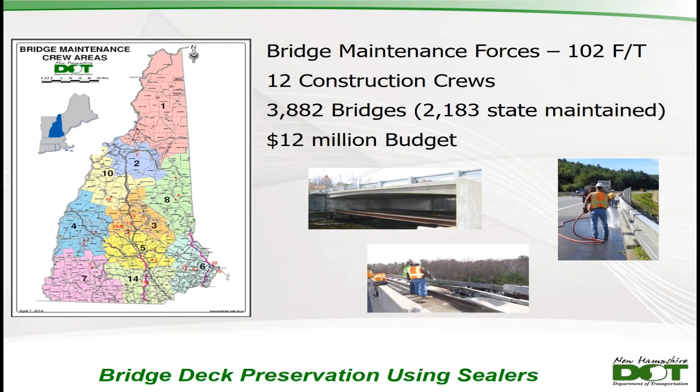So for those of you unaware, New Hampshire is located in the northeast in New England, bordering the states of Maine and Vermont, the Commonwealth of Massachusetts, and the province of Quebec. We do have in-state bridge maintenance forces, so we'll be discussing some of the work that we do in-house, as well as work done by contractors. I think some people refer to the region of the country as the snow belt. As a bridge maintenance practitioner, I think it's more applicable to refer to it as the salt belt. It seems like that's kind of what we keep fighting year after year.

Just a little background information. Per state RSA, in New Hampshire, all structures having a span of 10 feet or greater are considered bridges. So the New Hampshire DOT maintains 2,154 bridges. Of those, about 60% meet the federal highway definition of a bridge. We are primarily a membrane and pavement state. We have somewhere around 140 concrete-to-grade bare decks. We're using the term bare decks moving forward through the slides.

I have a couple photos of bare decks. The top is a job that bridge maintenance crews did, a superstructure and deck replacement, completed about 6 years ago. And then underneath is one completed by a contractor. That was a rapid precast bridge construction with butted box beams and a reinforced concrete overlay.

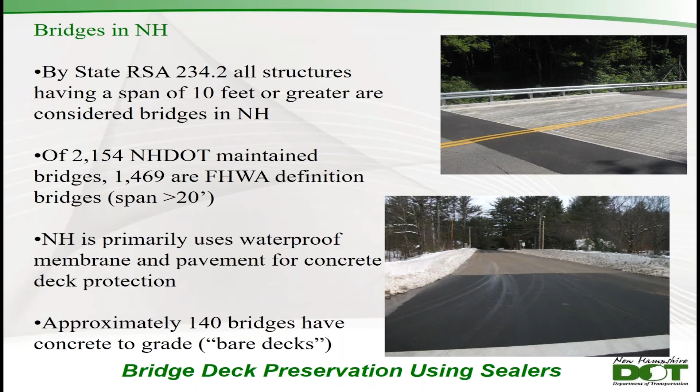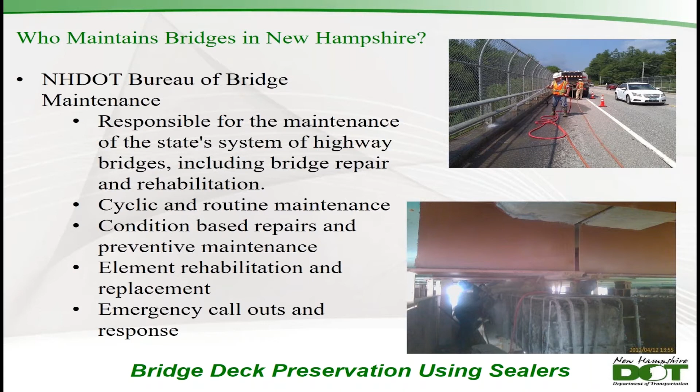Bridge maintenance and bridge work is coordinated through two different bureaus in New Hampshire. The first is the Bureau of Bridge Maintenance, where I work. We perform all cyclic and routine maintenance that's done on our existing infrastructure. We do condition-based repairs and preventive maintenance work, element rehabilitation and replacement, and we're also available for emergency call-outs and response. The Bureau of Bridge Design is responsible for the design and preparation of contract documents for projects that are performed by contractors. I'll be referring to this as the capital program in later slides. They're also responsible for the bridge inspection and ratings for state and municipally maintained bridges.

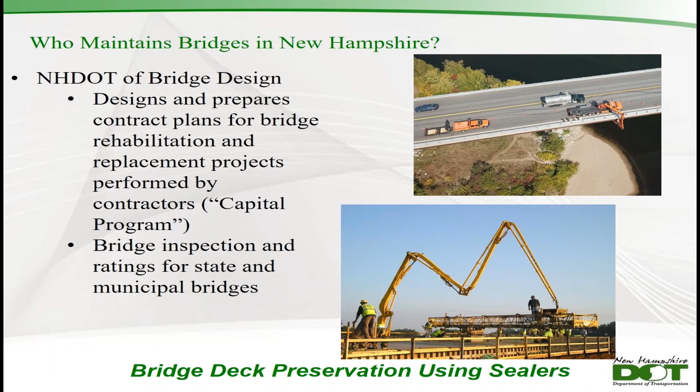There are four types of sealants that we apply in New Hampshire. First is a penetrating sealer, silane, as Tom discussed previously. And we're using this just to seal up the concrete surface. This is a product that's applied by contractors doing the capital projects. They apply it to new and existing concrete surfaces on bridges that they worked on. It's applied by bridge maintenance to existing structures on a 4-year cycle. So our crews have a set number of bridges that they maintain. We endeavor to wash those bridges on an annual, biannual basis. And then on a 4-year cycle, we'll follow up with a silane application to the surfaces.

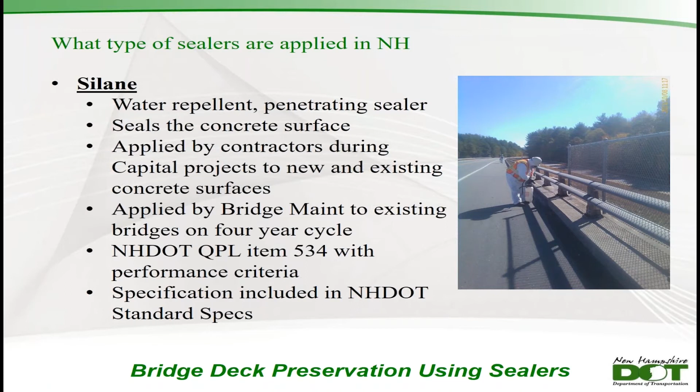New Hampshire does have a qualified product list item for silane. It includes some in-house testing that's done. And we do have a specification included in our standard specification book that discusses material properties as well as construction requirements.

We also do some crack sealing. We use both epoxy-based as well as methyl methacrylate crack sealers. I typed on the slide that it's applied inconsistently in the capital program. That's being a little kind. It's a little bit touch and go whether or not cracks get sealed during a construction project. We routinely apply them in bridge maintenance during our maintenance activities, and will often follow behind construction projects, sealing up cracks, either in decks or in the curbs. This is also a QPL item with performance criteria in New Hampshire. We don't have a specific specification in our standard specification book for concrete crack sealers.

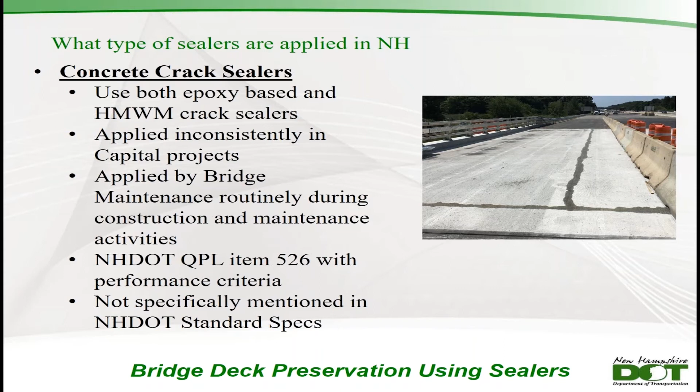The picture you're seeing is a contract job that, again, has a butted concrete girder bridge with a reinforced concrete overlay. So we have some reflective cracking coming through the rigid overlay that contractors addressed with a high molecular weight methyl methacrylate sealer.

Tom also referred to healer sealers. This is not a product we've used a lot, but it's one we anticipate using a great deal more moving forward. The product we've used is a methyl methacrylate-based sealer for cracks as well as the surface, and then we have a broadcast media over the top for friction. It hasn't been applied as part of the capital program. We have a couple bridges in bridge maintenance that we've applied this to based on some observed cracking and surface condition.

It's interesting how things come up. We were talking this summer about making it a point of emphasis for our maintenance crews to review the bare deck bridges in their area and to identify candidate projects for products like this. There is an NHDOT QPL item for this, for both methyl methacrylate and epoxy-based flood coats. It's not something that's specifically mentioned in a standard spec.

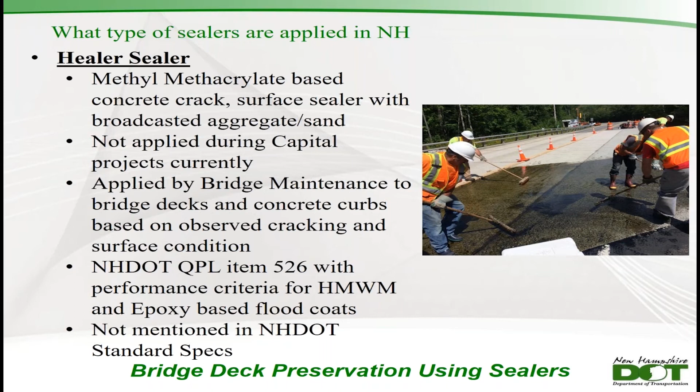The photo here is one of our northern crews applying a methyl methacrylate healer sealer to a bridge deck in Gorham. It's a deck that crew actually replaced about 2002, and we moved onto the job to do an expansion joint replacement, and while there, did a sealing on the deck.

We also have a little bit of experience applying thin polymer overlays. The particular product that we've used in maintenance half a dozen times includes a primer, which is really just a methylmethacrylate HMWM sealer that goes down to seal the cracks and seal the surface. It then gets a two-part polymer overlay with an aggregate broadcast over the top, placed down in 2 layers.

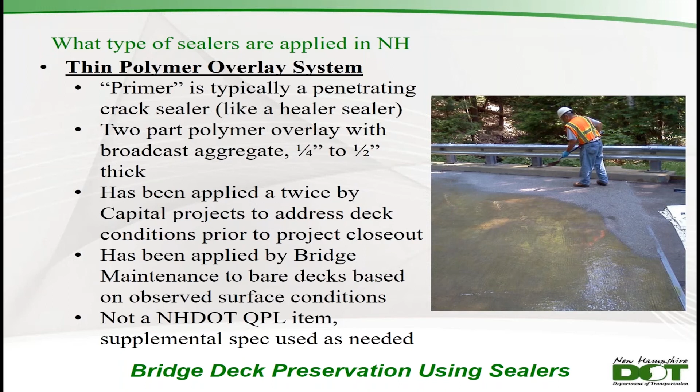This has been applied on a couple different capital projects prior to project closeout, and we've applied this probably to 5 or 6 bridge decks based on observed surface conditions. This isn't something that we have a QPL item for or a standard specification for at the moment. We're fortunate in New Hampshire that we're a relatively small state. We have 12 bridge maintenance crews spread around the state.

Each crew is responsible for somewhere between 175 and 250 bridges. They wash those bridges on an annual or biannual basis. So we have eyes that look at our bridges on a regular basis. And I can drive to any state-maintained bridge in the state within about 4.5 hours from my house. So it's relatively easy for us to go out and review our bridge decks, particularly if there's an emergency or something that was called in, we can have a crew or someone get eyes on it relatively quickly.

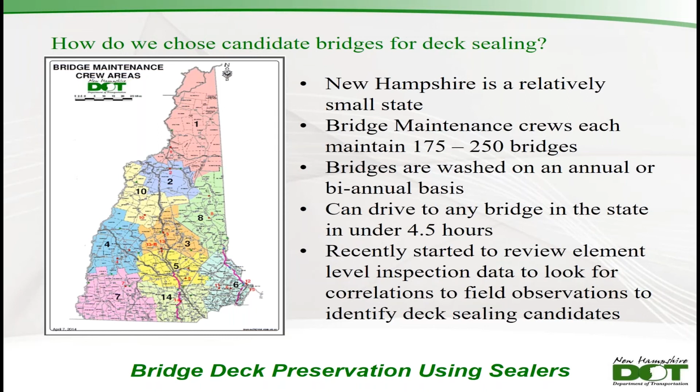Based on our conversations this summer about looking to promote deck sealing through the use of an HMWM sealer or a thin polymer overlay, we started to look at some of the element level inspection data just to see if there was anything that we could pick out of there that would help us either choose candidates or to watch in the future after we apply these products to see if there's any change in that rating. What we've found so far is that the most useful fields in the inspection data are the hand tag fields where the inspectors note cracking and then location.

For our bridge design personnel, they're able to also review bridges easily that are coming up in their work plan. They may have a bridge that's in the works for a number of years, and they're able to easily go out and review that deck, review that bridge multiple times if they need to prior to the project advertising. In addition, our bridge inspection teams are run out of bridge design, and so they're reviewing the bridges on a regular interval per the NBI guidance.

Now, in bridge design and to some extent bridge maintenance, we also have a list of bridges that we maintain in a database referred to as our maintenance and preservation list. And we put a ranking on that based on data from different sources. So we'll use the bridge inspection data, traffic volumes, the bridge type, the preservation history, and our design chief in bridge design will use that as a starting off point when he's looking for deck preservation projects.

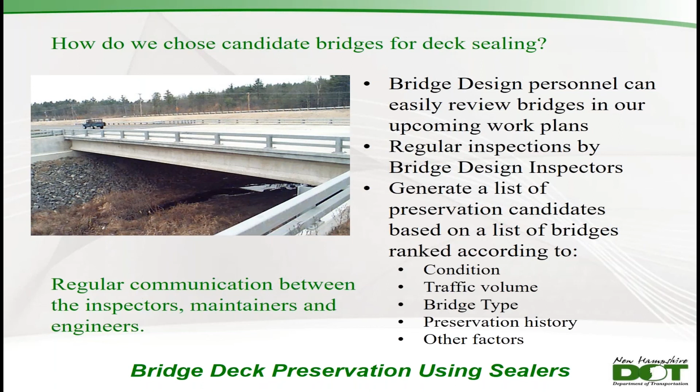Probably the most important thing that factors into the projects that get done is the regular communication we have between bridge design and bridge maintenance, between our inspectors, our maintainers, and the engineers. We've talked quite a bit about deck preservation and what bridges we're going to select as candidates for projects. When it comes to specifications, we do have material specifications for silane waterproofing, for our crack sealers and for HMWM sealers. Again, they appear on our qualified product list with performance criteria.

The silane has both material and performance-based criteria, and that's partly based on in-house testing that gets done by our research folks. Concrete crack sealers and HMWM sealers are on our list based on the material properties as verified by independent lab test results. We do not currently have a list of approved thin polymer overlays. That is something we've discussed with our research folks and something we will look at doing in the future as time allows.

In general, we don't do a lot of specification when it comes to surface prep or deck prep prior to applying these. Our qualified product list and our standard specifications refer folks to the manufacturer's recommendation when it comes to surface prep. When it comes to sealing with silane, we generally require just a power wash. With crack sealing, it's a wash and then a blow out with an air lance. With HMWM sealers and the thin polymer overlays, we generally specify a shot blast when available for the surface prep to remove grease, oils, loose concrete, things along those lines.

A lot of these products are being applied to bridges that have been in service for a number of years, and we want to have a clean surface with a good anchoring profile for those products to adhere to.